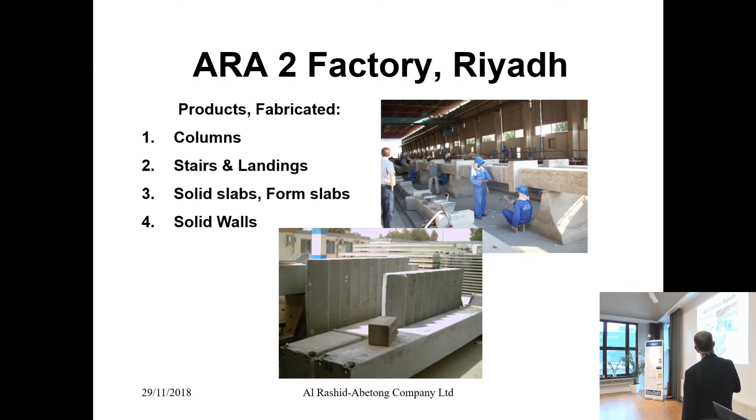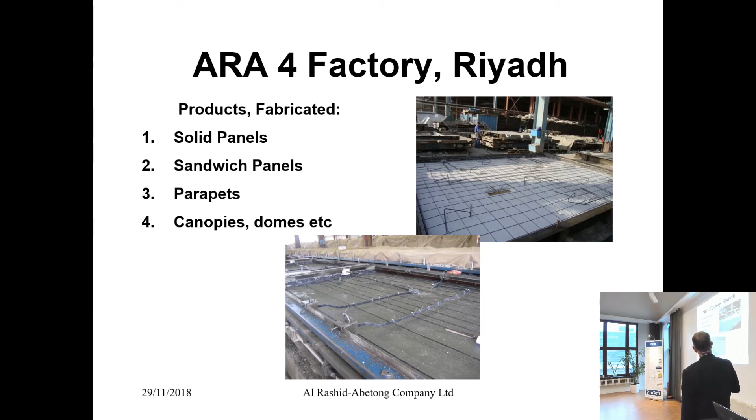This is my department, maybe like 2016 in Riyadh. We had some factories, 6 factories all in all. Columns, stairs, landing, solid slabs, form slabs, and solid walls in ARA 2, ARA 3, columns, pre-stressed beams, boundary wall elements, and solid walls. ARA 4, solid panels, sandwich, parapets, canopies, domes, etc. ARA 5, hollow core and boundary wall footings, roughly 15,000 square meters per week of hollow core.

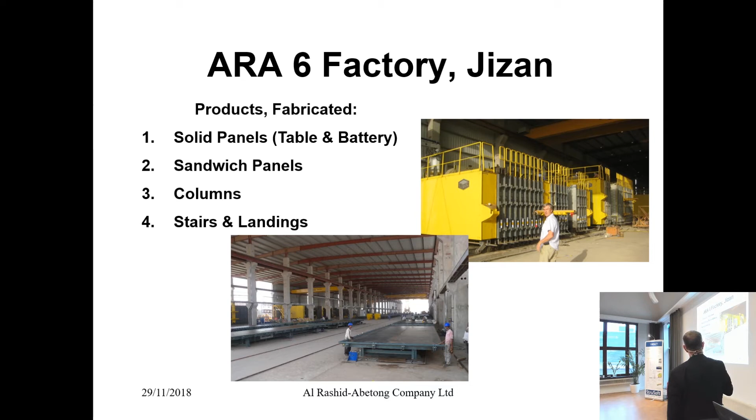ARA 6, that's the Jizan factory, battery elements. Maybe someone recognized Anders Axelsson from Kvicksund, he was there for a while. We made everything except pre-stressed elements there. It's actually on hold now, the factory, because we don't have projects in that area.

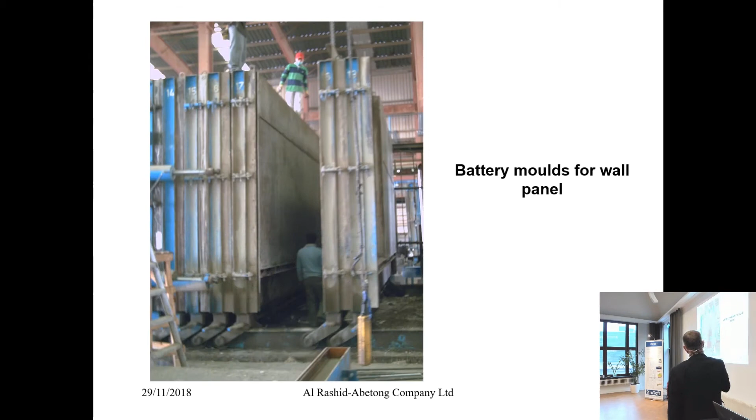ARA 7 in Riyadh, double T, solid wall, sandwich, and pre-stressed beams. The fabrication, battery moulds. We had a lot of battery moulds for simple solid walls. A column, sometimes they look like Christmas trees there, but they just build a new mould.

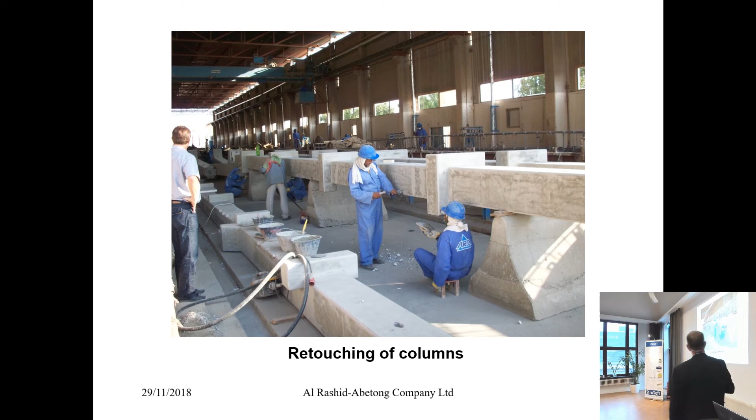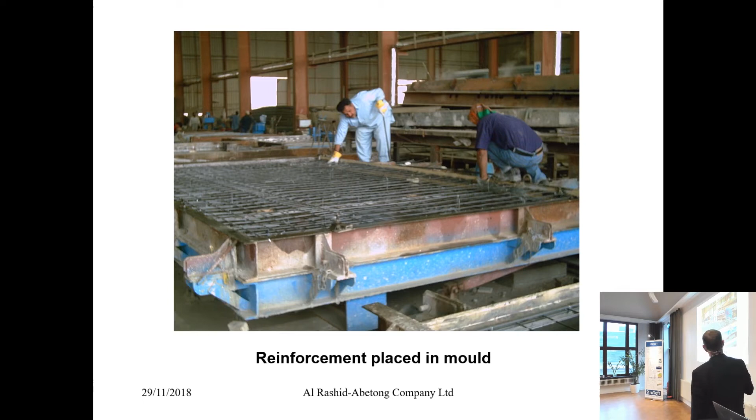Reinforcement, and you see in the corbel. These guys are putting reinforcement for a solid panel. And here we have, what you see here, precast is pretty much the same here as there in a technical sense. They have electrical things there, but they don't have plastic outlets.

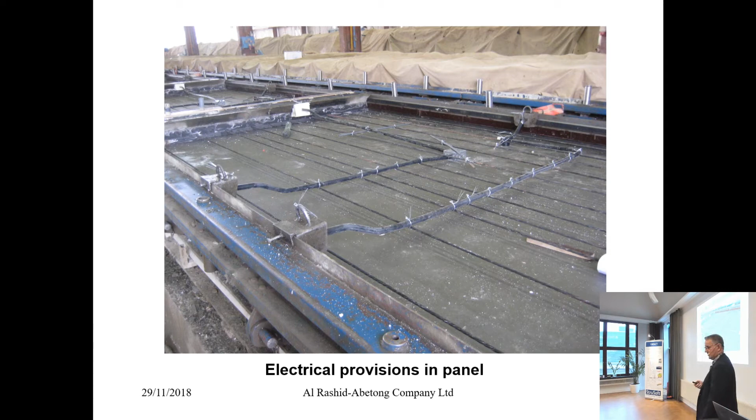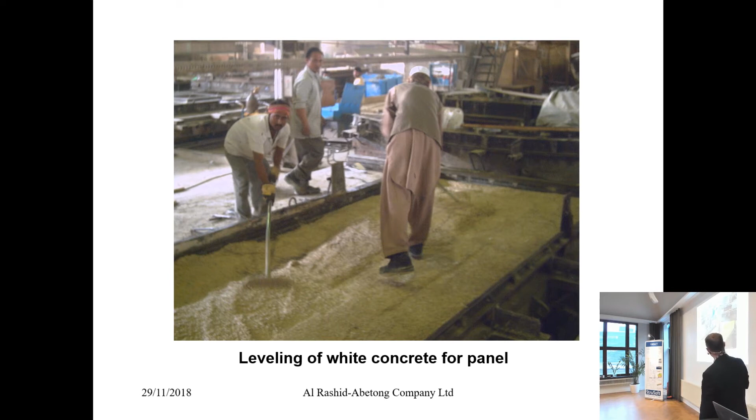It's all galvanized steel, British standard, and the British are quite conservative, they don't change that easily. And here we have the first external layer for a sandwich panel, and the guys are leveling the first layer. It's white concrete. And then we have the insulation. They are not so eager about the cold bridges, because it's warm bridges.

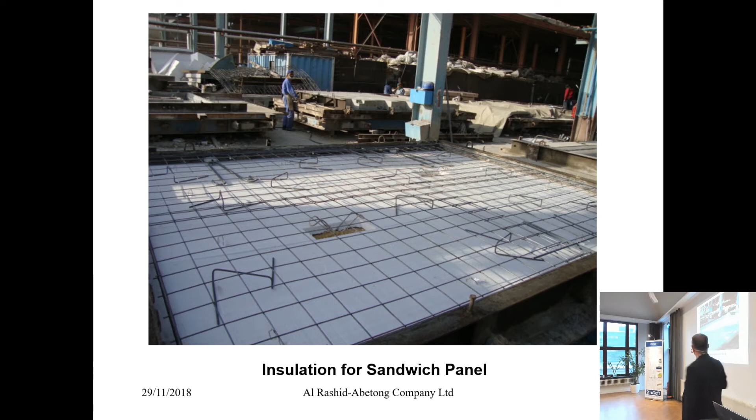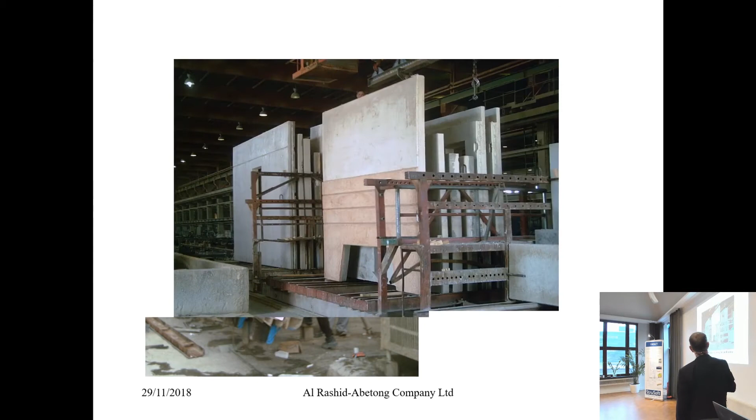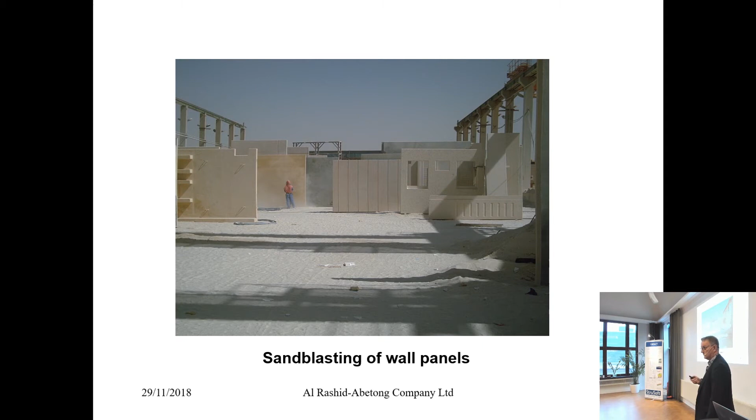You see here the lifting and the sandwich anchor, element under stripping, and here they are in the rack waiting for retouching. Here we have the sandblast area, that's the most common surface treatment we had, sandblasting. So you get this desert color, quite nice but quite uniform also. We had our own source for aggregates, our own crusher and everything, on an A-frame for delivery. Some checking of a landing.

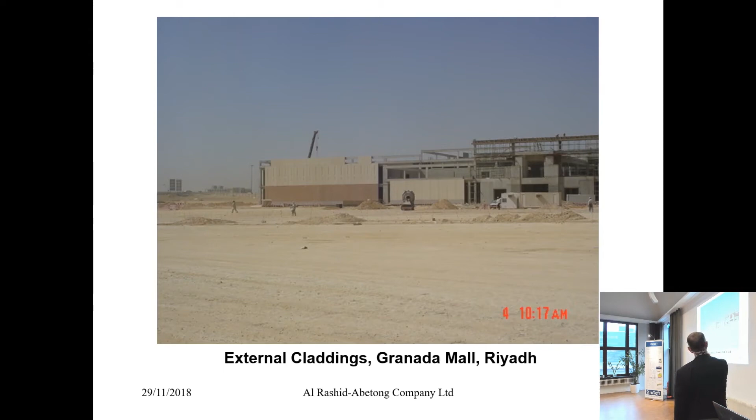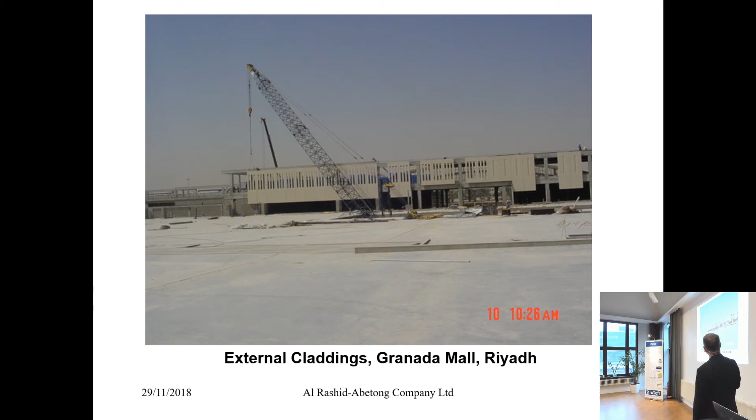And then we come into erection. This is a shopping mall that was erected around 2004, called Granada. This is a CIP structure where we made all the claddings plus hollow core and double T slabs. Here we have the double T slabs for the parking area on CIP beams, pretty much the same as here.

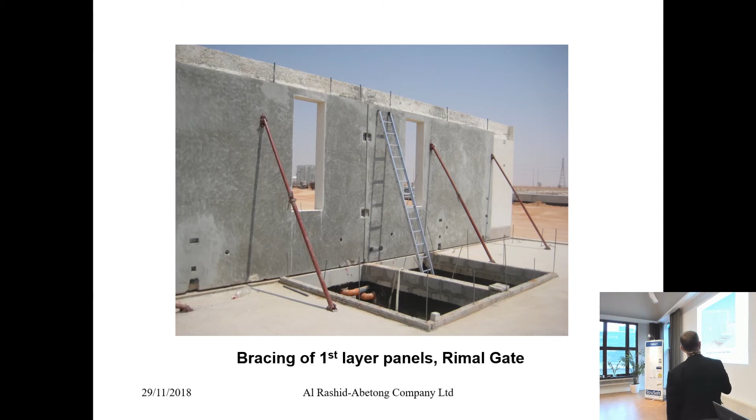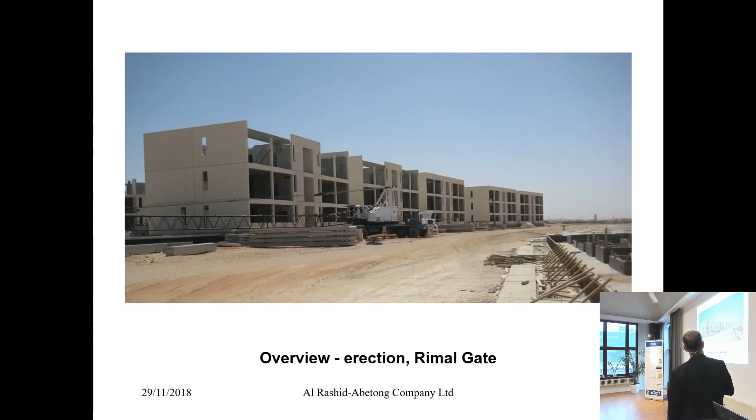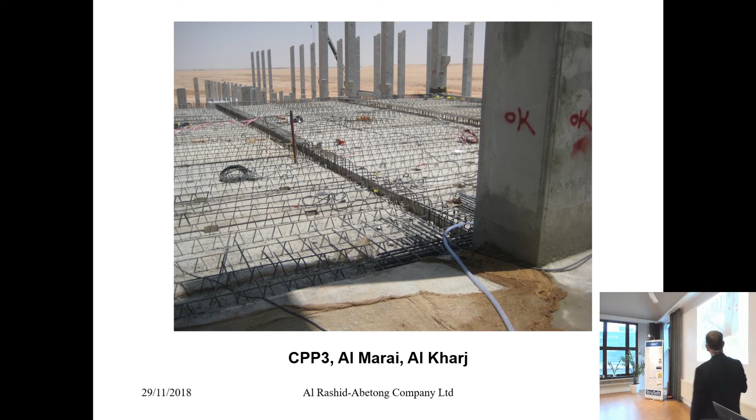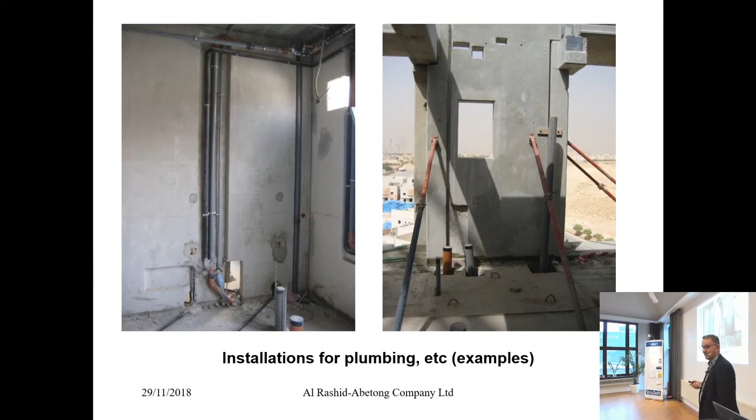This is central processing plant number 3 for Al-Marai. Al-Marai is probably the biggest dairy plant in the Middle East, making milk, juice, cheese, everything. We have built all their factories. You can see it's in the middle of the desert outside Al-Kharj, 100 kilometers southeast of Riyadh. The cold store, to be. We also have installations and headaches with that, of course, for plumbing, electrical, whatever.

And then I have some, right, some finalized and ongoing projects. Kingdom Schools, we actually made something called Swedebeam. It's called Spännbarksystemet in Sweden.

There is something called Princess Noura University, it's the world's biggest university for women, about 50,000 students. And this is for the staff housing, where teachers and other people live. We built 350 villas, the same but different colors, so they can find their place. They have their own railway inside, and they have everything, it's like a city of its own. It's on the way to the airport in Riyadh. Here you can see a closer look.

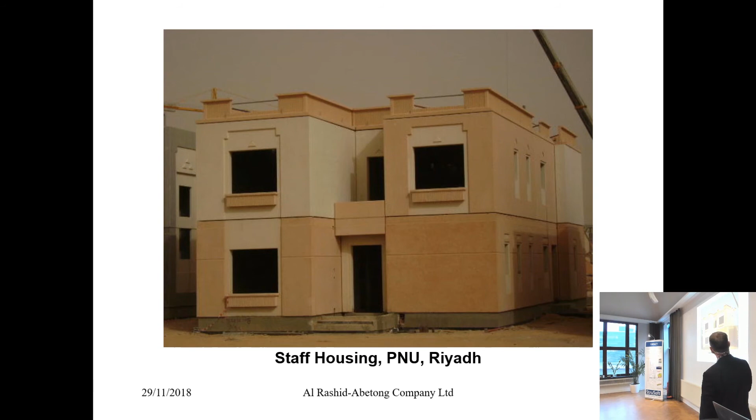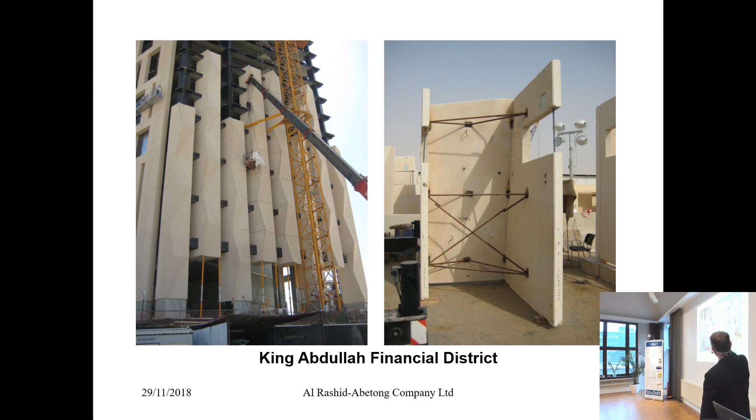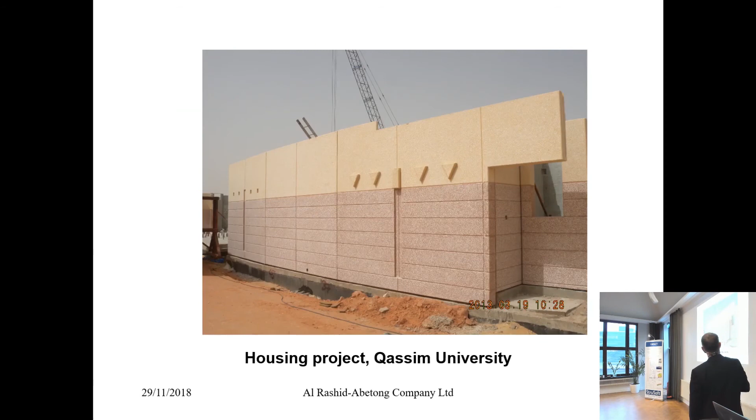Another housing project for Qassim University, a little north of Riyadh. Pigmented elements.

This is for Ministry of Defense, near Jizan. Maybe they prepared for the war already, I don't know. It was in 2014, and if you have 24 buildings like this, it's quite some repetition. It's precast friendly, you can say. I think we had 24 of this, and we had 20 of another kind.

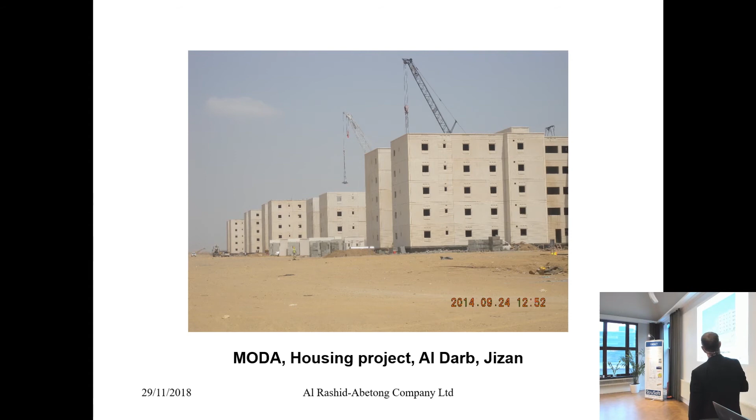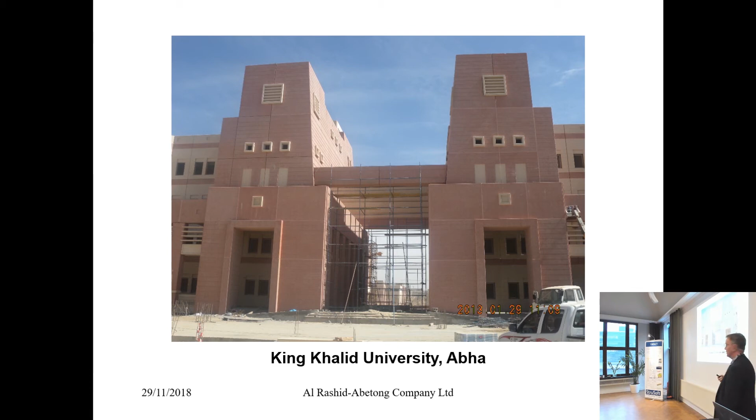King Khalid University in Abha. Abha is a little bit also southwest, but it's in the mountains. It's at 2,200 meters altitude. This city is roughly the size of Gothenburg. These are claddings on a cast-in-place structure, and we made most of it together with a Chinese company.

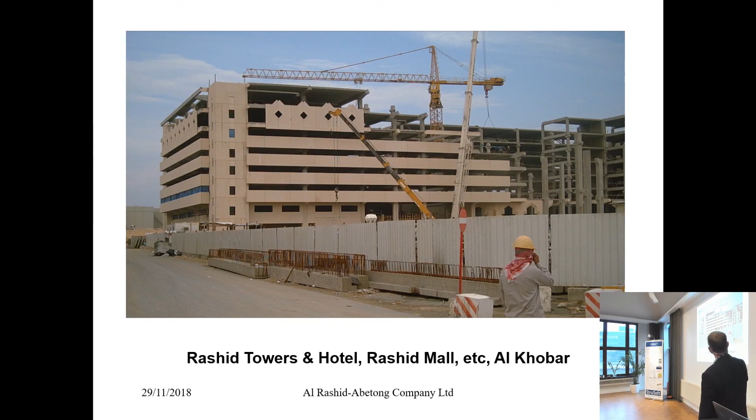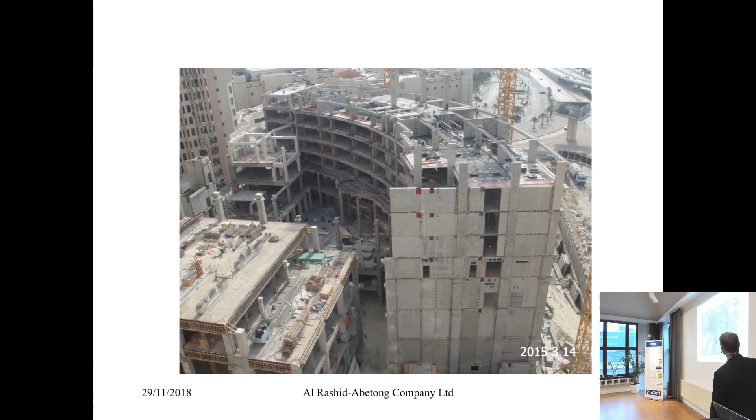This is the parking building in the same area, 5 levels of parking. And this is a hotel also in the same area, where we built for Hyatt Regency. You can see, obviously, this is a stabilizing wall unit, all welded together to act as a diaphragm. It's around 10,000 pieces in this hotel.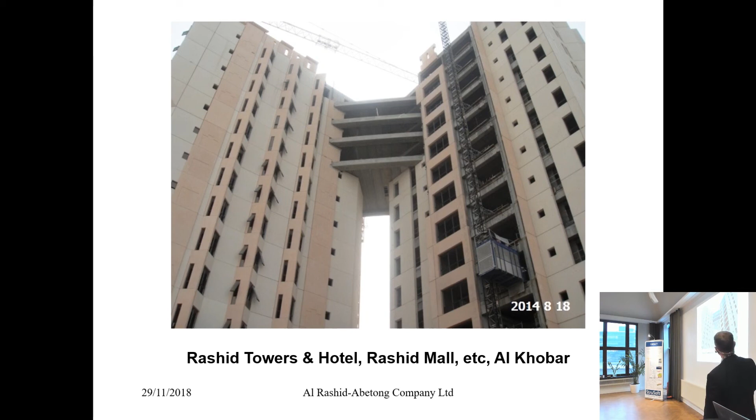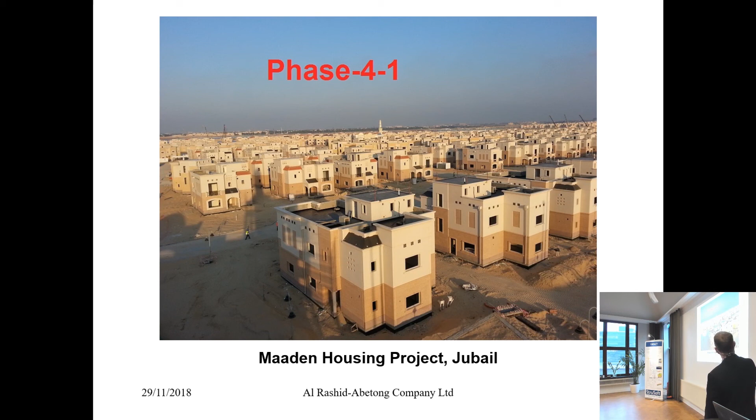In Jubail, on the Gulf side, we built 870 villas like this. Nice. It's for a mining company, for their employees.

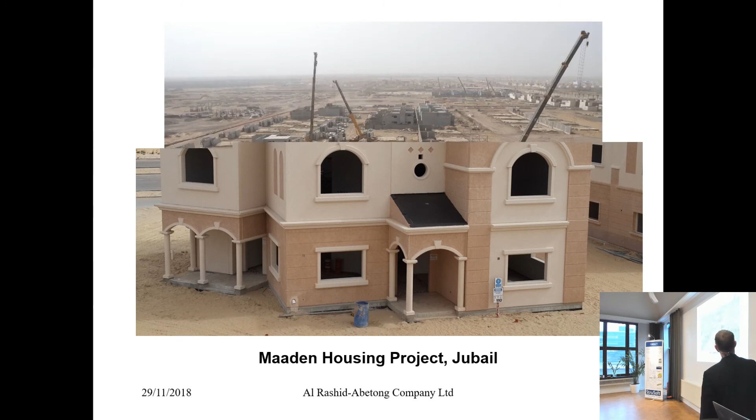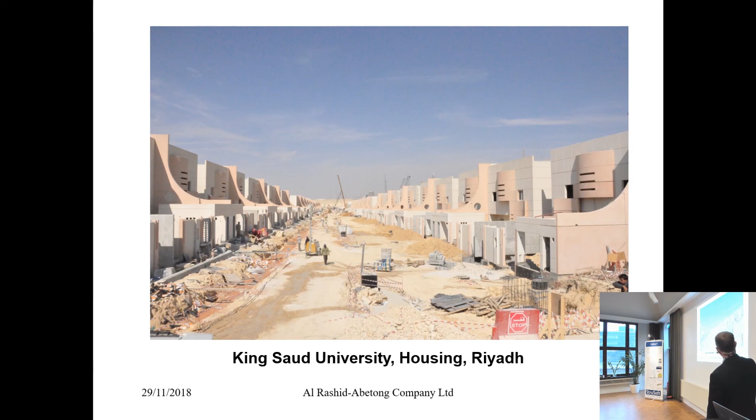Riyadh, King Saud University, this is staff accommodation. Some nice features, nice elements. And this is the same, but we also built some apartment buildings. I don't remember, I think we built something like 20 of these buildings for the students.

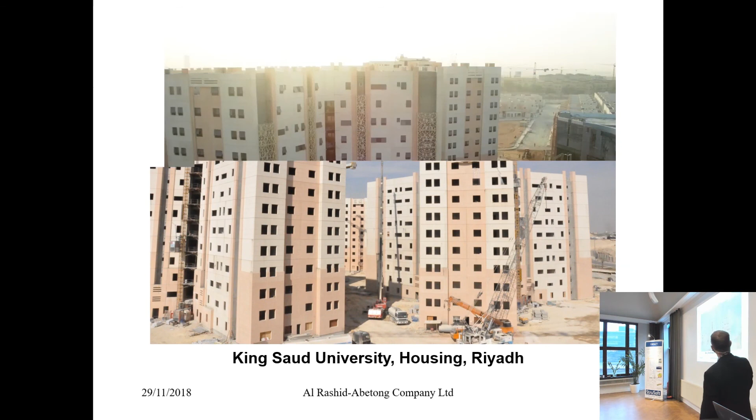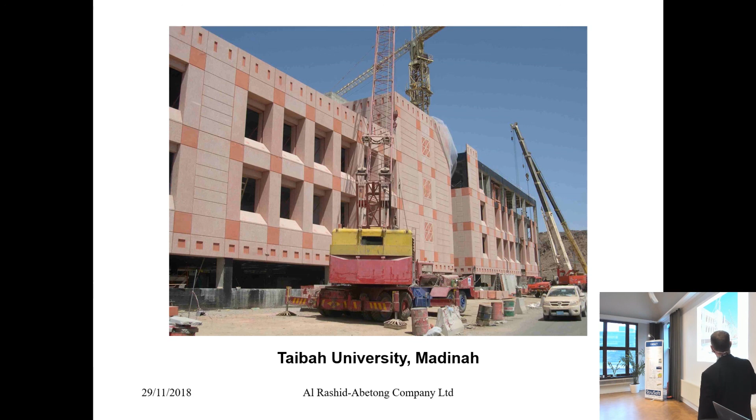Quite nice. This is Taibah University in Madinah. These are claddings on a cast-in-place structure. Very nice pigmented elements.

Yeah, it's good. Only 12 images left. The same one.

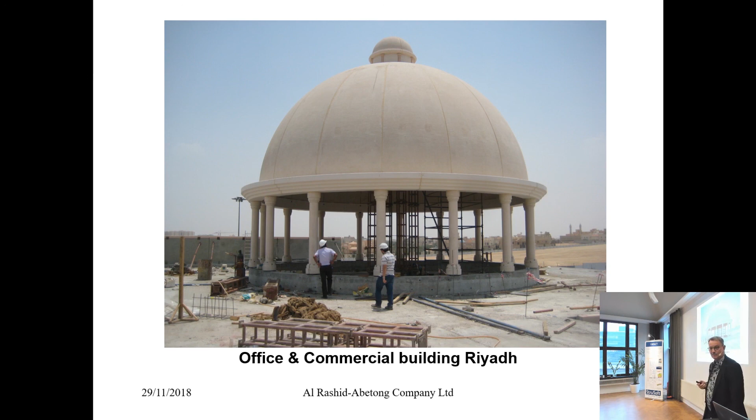This one you saw already. This we made in precast, all of it. Can we do these elements in Impact? Linked. Good. This is something we also made, segmented elements in precast. This is the same.

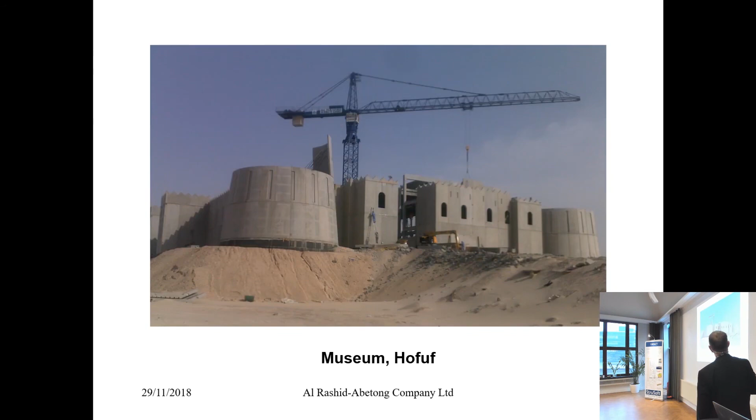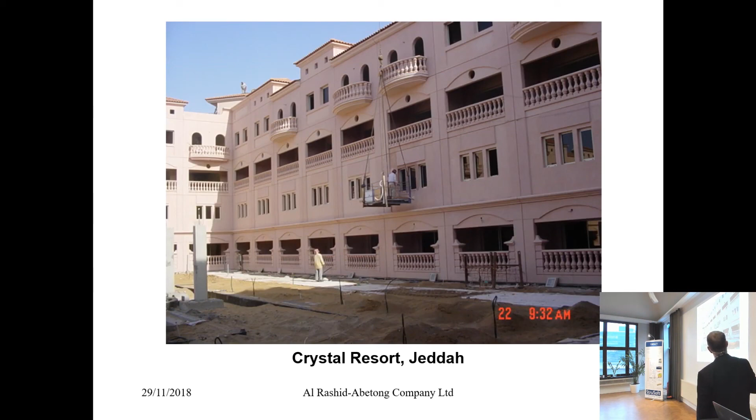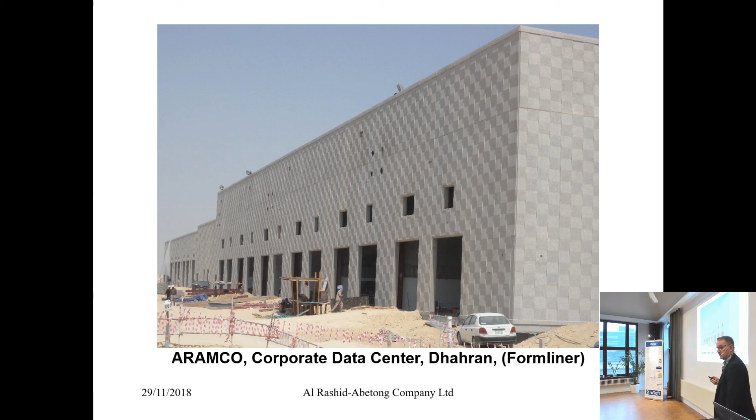And finally, a corporate data center for Aramco, the big oil producing company, in Dhahran, with a formliner. It's a Reckli formliner. You can do a lot of nice things with precast.

I did it. I did it. Thank you.